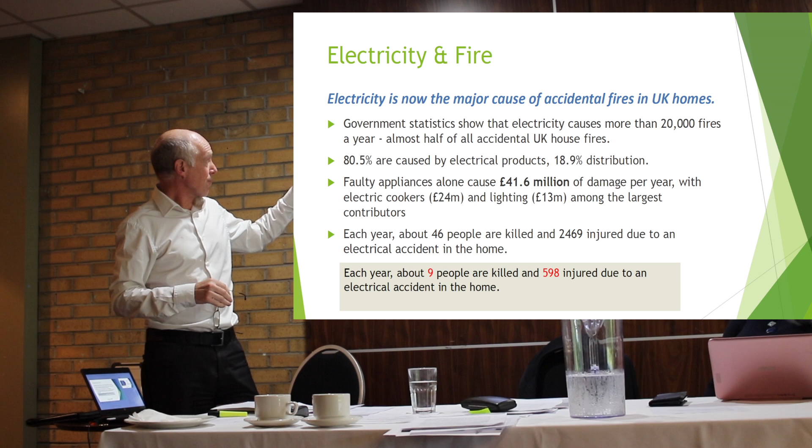And in the government statistics, I think in England 25% of fires are down to electrical fires. In Scotland, it's 2/3 of fires. So there's a real issue with fires in Scotland. And therefore, how do we deal with that? I'll come on to that in just a minute. So how do we deal with the guidance in Scotland? Well, first we have our technical handbooks.

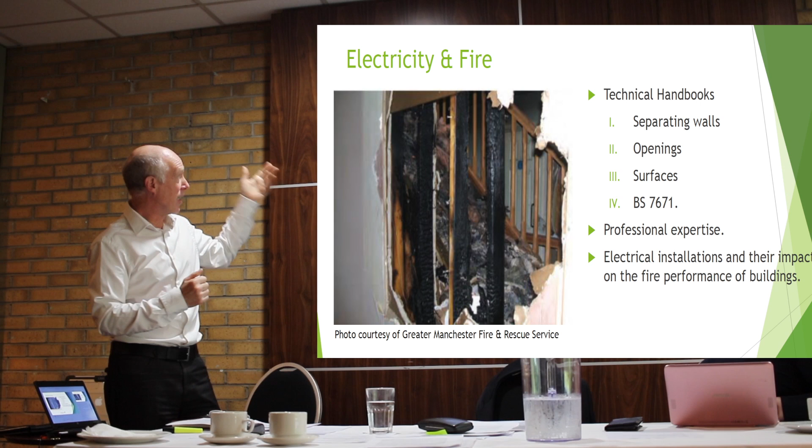Going through the guidance, we have guidance on separating walls. Good guidance where we say, you've got a separating wall, you shouldn't have cables in it. That's because we don't know what's happening on the other side of the wall. Cables can be damaged, or a fire breaks out. This is an internal wall, but you can see the damage that can take place. That photo is from the bottom guidance document, Electrical Installations and Their Impact on Fire Performance in Buildings. If you haven't seen that guidance document, it's worth having a look at.

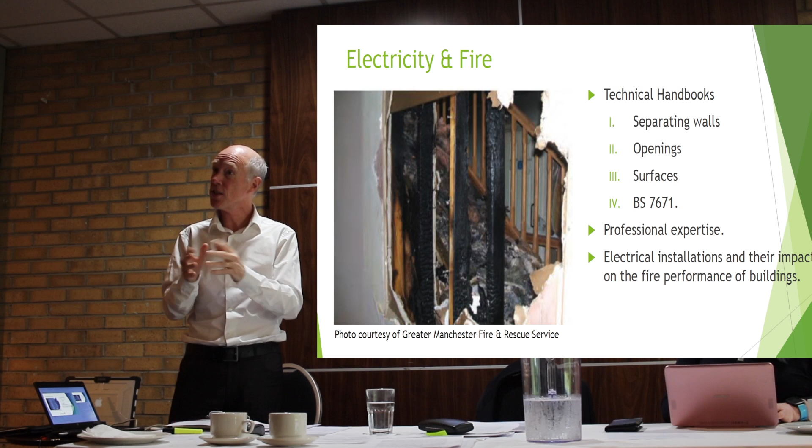It's a really good document put out by Electrical Safety First, which is the overriding charity body for electrical work. It looks at particular things like downlighters in houses with engineered joists compared to just your standard joists, what you should have and such. But regarding the technical handbooks, we have something in separating walls, but for openings, we allow you for compartment walls and separating walls to put cables through, and all we ask is that you fire seal around the cables. When we come to surfaces, we talk about cavities within buildings, but we specifically exclude cables from it.

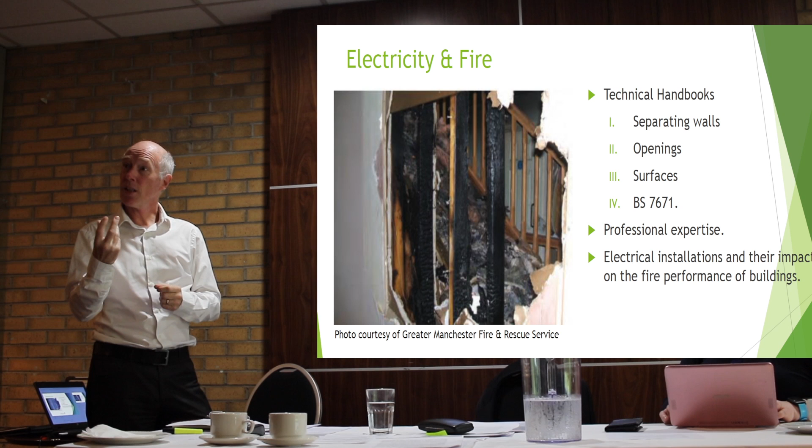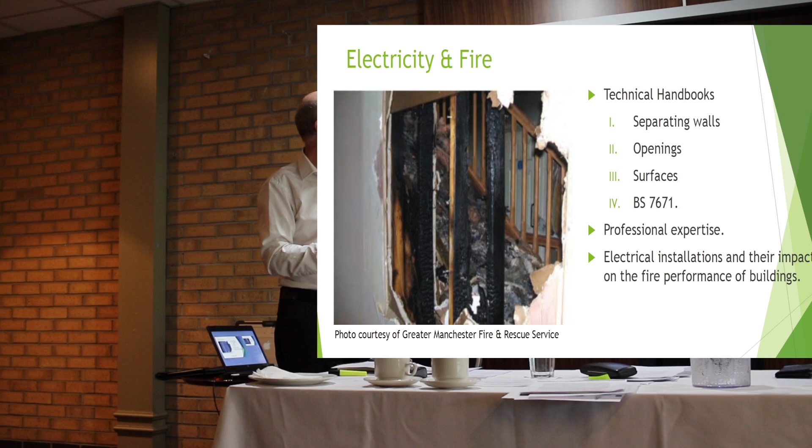But we're finding our buildings are festooned with cables, and it definitely seems to be a problem. So we don't really deal with it from a national point of view, and it's the same throughout the UK. From a national standards point of view, UK government doesn't really deal with cables. It's all left to industry through BS 7671, and that really only touches on cables if we're providing fire safety measures, like fire alarms, saying it'd be a good idea to use a non-burning cable, a cable of a specific fire resistance.

So we're relying on professional expertise in writing this guidance document and then going out and signing a building to say that it's okay. And is that okay? Is that an appropriate way forward? Much like all regulations, we seem to react to incidents, and this is no different. I thought it was worthwhile bringing this up. This requirement came in 2015, but I've had various conversations over the last year or two with fire risk assessors, and they weren't aware of this change.

So there's been a number of fires where firemen have lost their lives, and cables have possibly played a part in that. And at the coroner's investigation into the fire down in Hertfordshire, I think it was, the coroner said we really have to do something to address this, and recommended that the guidance was changed.

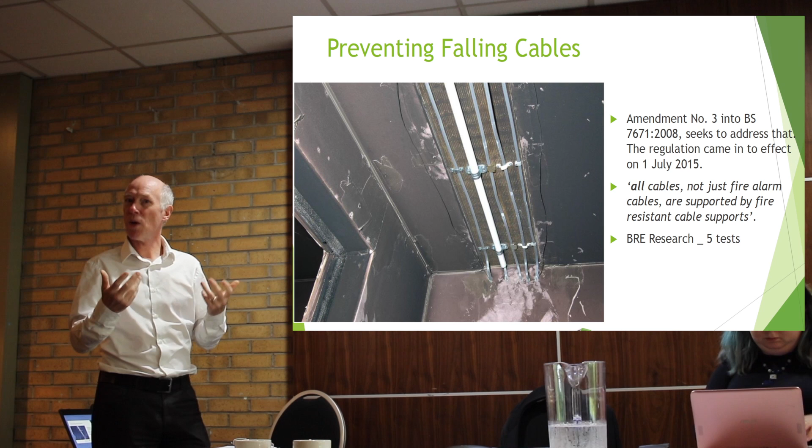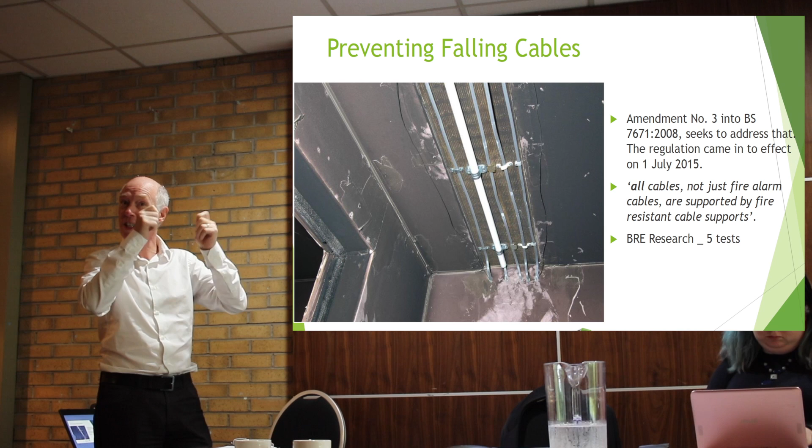So what this says is we have to update the guidance. And as I say, the guidance is not government guidance, it's industry. So BRE, in support of that, wanted to look at what products are out there that will help deal with the situation. So they set up a test rig, basically a room with concrete and timber beams over the top of it so that you could screw fixings into, and they put up 5 cables there, as you've seen, and then basically set a fire. And it demonstrated that as long as it's non-combustible fixings, your metallic fixings and such, then the cabling will stay in place.

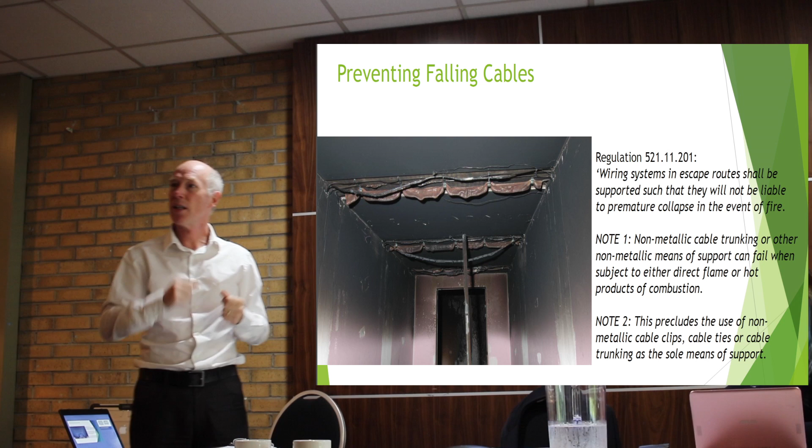But one of the things that did come out in it was, you have to remember, if people are fixing cables up there, if you put a plastic Rawlplug and you put a metal screw in it, in a fire the Rawlplug is just going to disappear. So they therefore rewrote their guidance, and basically it says that if it's an escape route, your cables have to be appropriately supported by metallic or non-combustible fixings, which is your normal metallic saddles and such. You could still have it in a plastic surround, but as long as you've got the non-combustible fixing, as you can see here at the front, this is again from their test, the cables won't fall away, and so therefore it keeps them out the road.

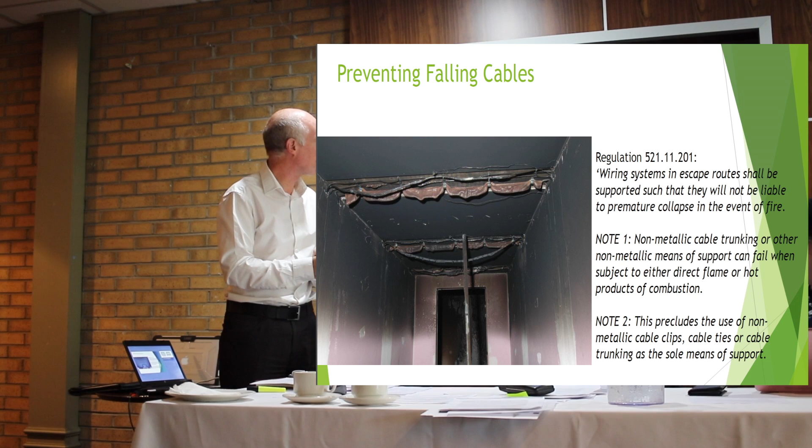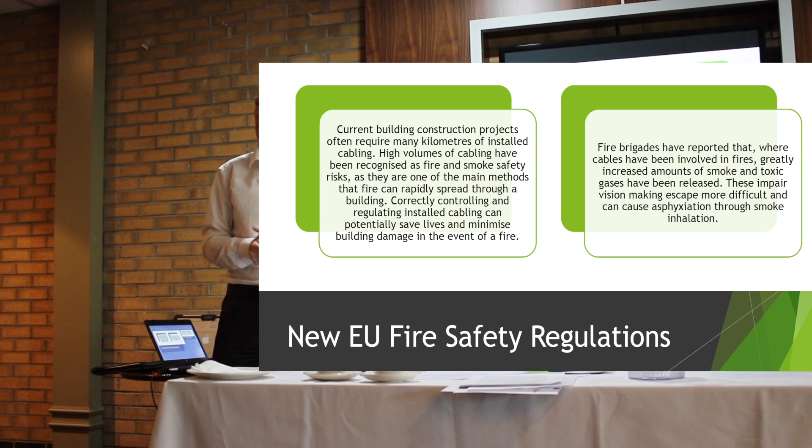Now, that's a sign of industry reacting to an issue that's been identified. But what it all does is show, I think, cables have been very much overlooked from a fire point of view. The fire service are talking about how they're going into fires, with huge amounts of toxic smoke given off by cables. And these cables are running everywhere, under floors and such. If you go into a typical office building, you've got cables going to all your standard sockets, each desk wants to have all their own cables. We've got our IT hubs, never mind all the factors that we put in for fire safety. But depending on the cable that goes in, it can be a high fire risk.

And I'm sure if I asked any of you in the room how you know what the fire rating of your cable is, you wouldn't know. We all recognise it. We've seen the drums that go in buildings, just grey cable, and that's it. If you're a fire risk assessor or designer, you really don't know. Now, BS 7671 recognised that you do need fire rated cables in certain conditions, and it came up with a recommendation that you should have halogen free cables in certain conditions.

Now, I've kept the right page, hopefully I'll be able to read this out to you. What they describe is low flame cables and such, and they have 3 different criteria, and they're quite confusing. Here's low smoke zero halogen, low smoke and fume zero halogen, low smoke, and that's 3 different criteria. How do you know you're using the right one? And then there's nothing to tell you what cable you should be using in what particular situation.

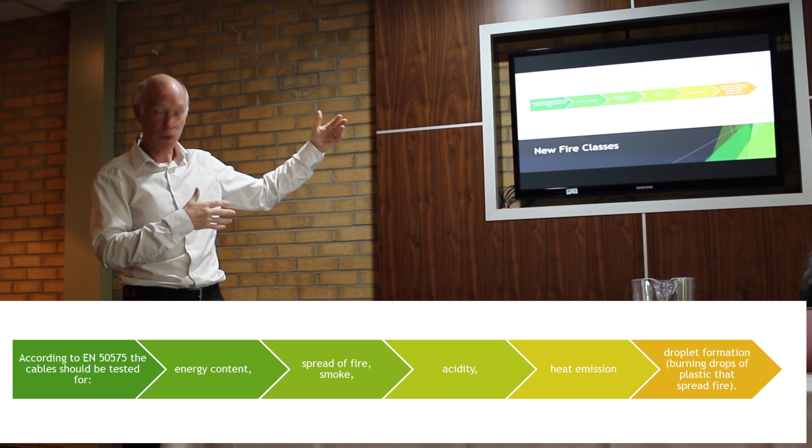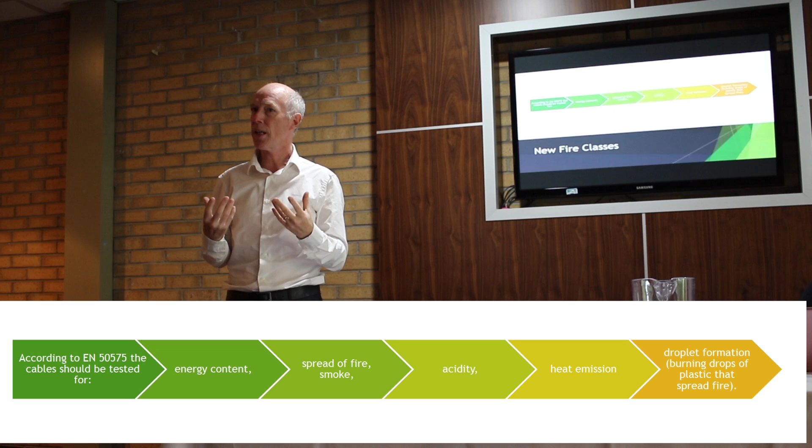They're looking at the energy content that comes off when you burn the cable. They're looking for the spread of fire on a cable, the acidity. I mentioned earlier that once water goes on the ordinary PVC, you get hydrochloric acid. They're looking for the heat output and looking at flaming droplets. All of that should be familiar to anyone that uses the technical handbook, because it all reflects what's in the reaction to fire tables within the technical handbooks and the annexes.

Now, what I've done is I've pulled it all together into a table. In fact, you can't see that, so if I just pull up a particular part there, they've rated it from A down to F. All it's doing is giving you your vertical spread of flame characteristic, and then taking you through a number of tests for a burn characteristic.

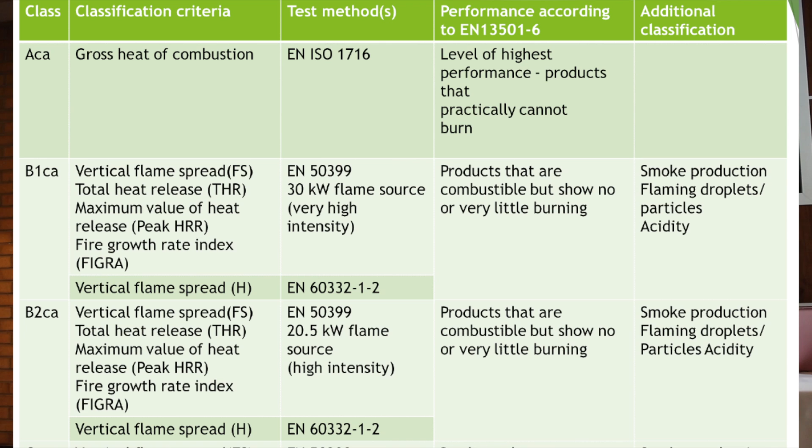And with the part that I've highlighted there, you can see it's giving you the actual test, 20.5 kilowatts and such. But out of that test, your criteria is totally different. One that's 15, another one that's 30 kilowatts, another one that's up to 500 kilowatts. So it gives you clear criteria that it has to meet, as well as if there's any flaming droplets. But all of that just reflects what's in the technical handbook, particularly for the reaction to fire, the Annex 2F, for roofs and such. It's really very similar to that.

So now, if you're looking for cables for buildings or designing them, it's really clear: I want a Class B, I want a Class A or whatever, just like you do for any other reaction to fire. I'd been in discussions with the British Cables Association, and they were saying that you should always specify cables that have a CE mark, and you've got to do that now, and it has a declaration of performance, basically telling you it's been tested in accordance with X, Y, and Z, and this is its rating.

Now they recommend you should be specifying a cable of E or above. The classification goes from A to F, and just a wee quote from when I was speaking to them. I was saying, so you're recommending E and above, and he's going, yeah, because if you use class F, which is kind of like your standard grey cable that we have, it burns like a candle, so you wouldn't recommend that. So just to quote him.

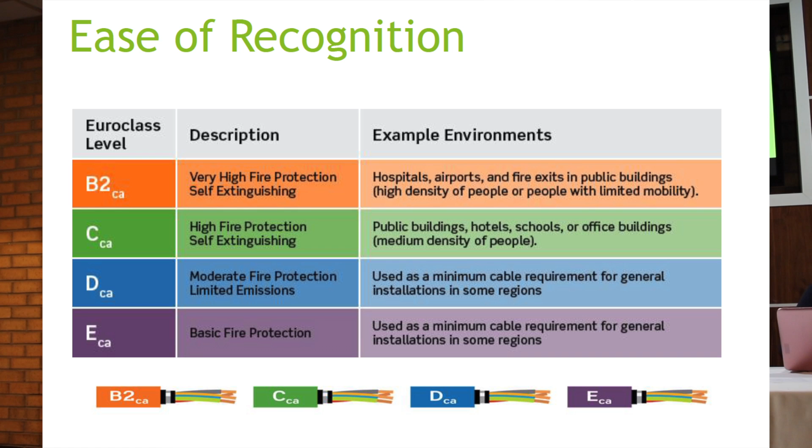So we've been on many a job where we're firing this stuff in, oblivious to the actual risks we're putting into buildings. It's now quite clear. In fact, some manufacturers are going that wee bit further and making it clearer for us. This is Brand Rex, one of the suppliers, and they've colour coded their cables so that when you're doing a fire risk assessment, it'll have bands on it, and you know that's an orange cable, that's class B2ca. And not only that, they give recommendations for what buildings it should apply to.

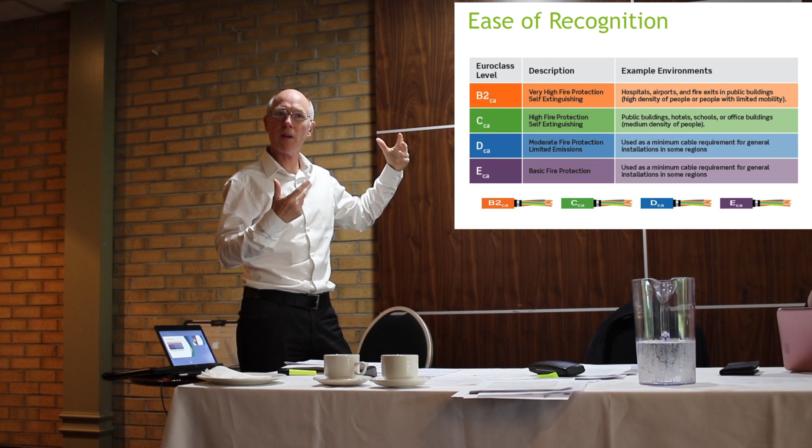So for instance you've got your B2, that's hospitals, airports, high assembly buildings, or where you might expect people to have a delayed escape and need assistance. Class Cca is public buildings and schools and such, where people are alert and can quickly self-evacuate, down to just more your standard run-of-the-mill buildings.

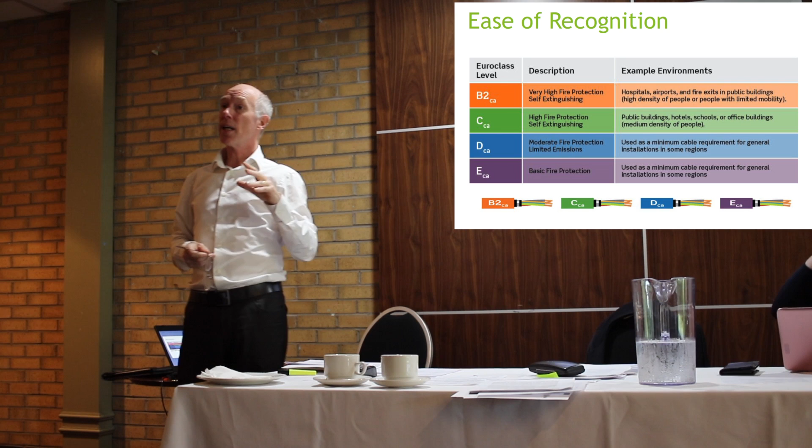Is that just reaction to fire? It's just reaction to fire. They're actually looking at bringing out a harmonised standard for fire resistance for your actual fire cables, but it's not out yet. They're working on that. So this is just reaction to fire.

So where's that table from? This is a manufacturer, Brand-Rex. I spoke to the guy on the phone, and he was saying that other manufacturers are looking at a similar thing, but it's not adopted by industry. But it's a really good idea if they do.

It just makes it so much easier if you're going out to inspect, or know what. So if you go to guys like Prysmian, they'll tell you the amount of money they're spending trying to stop Chinese counterfeits. And so now you'll just get this where it comes in the right colour and you'll go, that's fantastic. Well, it's back to what we're saying with Glasgow, with 10,000 goods that they've impounded just over the last year or two. So that's definitely a real problem. And that's the same - there's one with the glazing and such come up recently as well.

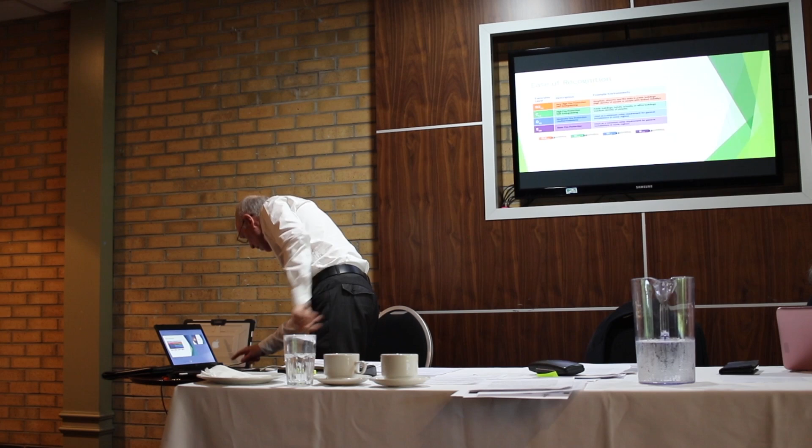So that really kind of concludes my talk. It's just to bring you up to speed and let you know that this document is out there, and it is of benefit to the industry, because it allows you to ask really simple questions - is it a low zero halogen cable, whatever? Very confusing. There's a new system, reaction to fire. We actually all know that terminology, and it's far easier to identify - is that cable that you're putting in appropriate for that type of building? Before, I think it would be very difficult to ask those questions.

How engaged are the industry?

Well, I only know with the people I was speaking to, but I spoke to the British Cables Association and a couple of manufacturers, and what they were telling me is they've been involved through the process. Because my experience with the ductwork industry is an absolute nightmare - they've had a harmonised standard since 2013, and none of them will CE mark anything. And so anytime you put it in your spec, they just go back and say, oh, we can't source any of this stuff because nobody makes it. But the big difference is...

We had an opt-out in the UK on construction products, so although things should have been CE marked, we kind of had an opt-out, so it wasn't mandatory in the UK. That's changed, even for 2013. Time flies with me, but I don't know when the construction product regulation changed and came back in. I do think it's quite recent, and it's only since then that it's become mandatory in the UK. I mean, 2 years max, I would have said, but I don't know if it's as long as that.